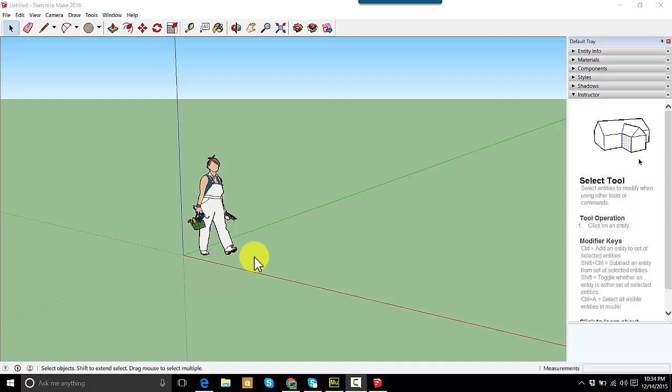Okay, so here we are in SketchUp. Let's make sure we have the toolbars we need, so we're going to go up to View and select Large Tool Set. So now we've got the large tool set up.

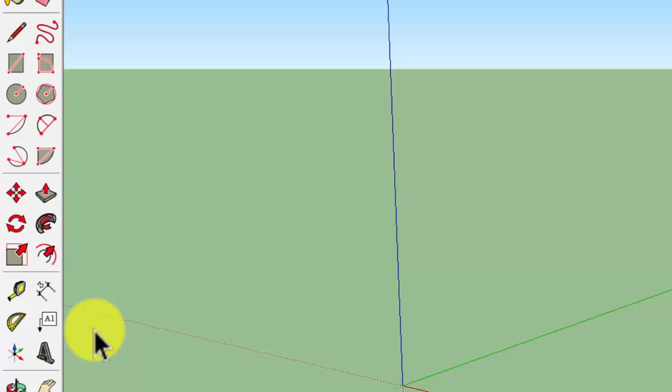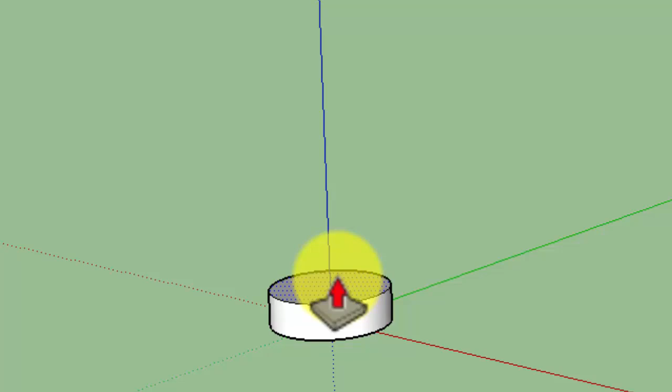The first thing we're going to do is get the circle tool and make a circle. You don't want to make it too big, but this is for the pot of your Christmas tree. Then you're going to get the push-pull tool and pull that pot up, however big you want it to be. You can look in the right-hand corner, and it'll tell you how many feet and inches it is, if you want to keep it scaled.

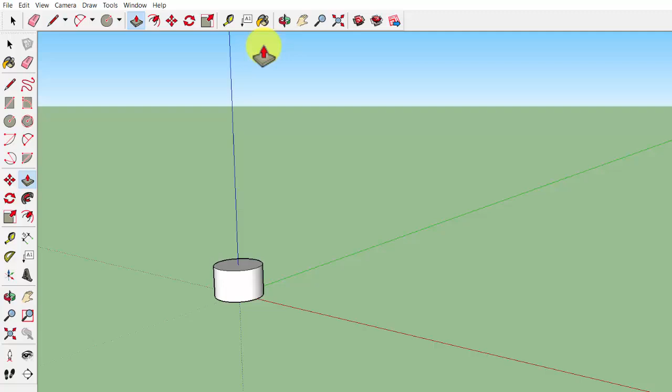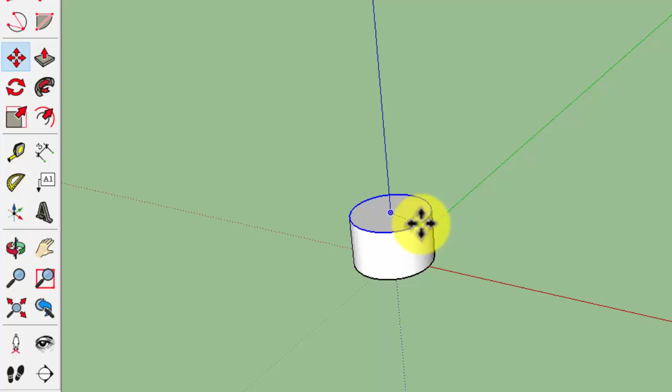I think I've got mine to about where I want it. I'm going to use the orbit tool just so I can see how it looks and make sure it's in the right place. Now I'm going to get the move tool, come out to the edge and try to find an endpoint. I just want the light blue to be on the edge, not on the face. This can be a little tricky, I'm going to try it a couple times. There, I got it.

So it kind of gives a flare to our pot. You don't want too much of a flare, but a little bit. Then I've got the orbit tool, and I'm going to just see how it looks. I think that looks pretty good.

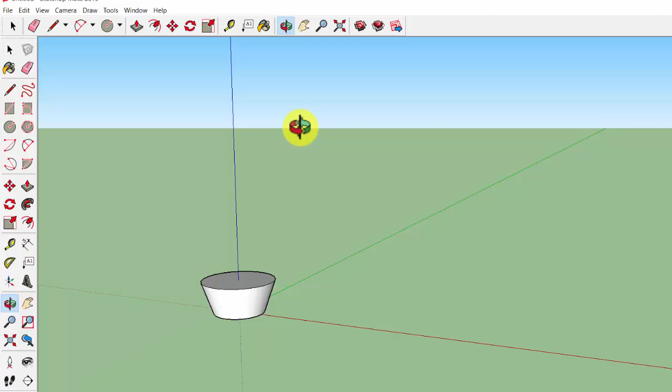Now we're going to make a brim for our pot. I'm going to go over and get the push-pull tool, but hold down control so I duplicate the surface. There you'll see there's a line, so it looks more like a pot. We made it flare out, and now there's a line.

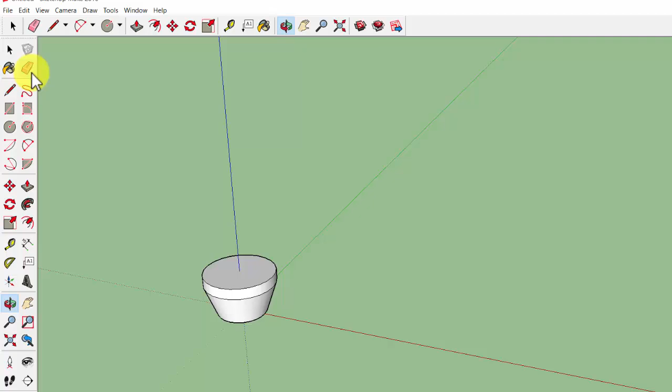I'm going to look around using my orbit tool again, go back and get the select arrow, and select the top. Then you're just going to click the delete key on your keyboard, and it'll make it look like it's shallow at the top. So it looks like a real pot.

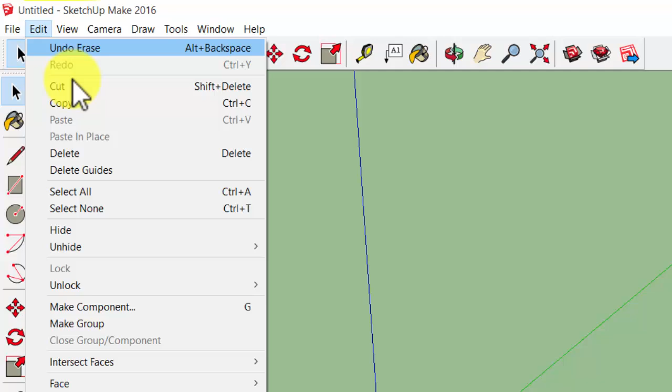I'm going to move it around. I need to group these things together, so I'm going to go up to Select All. Then I got them all selected, and I'm going to click Make Group. So now everything on the page is a group.

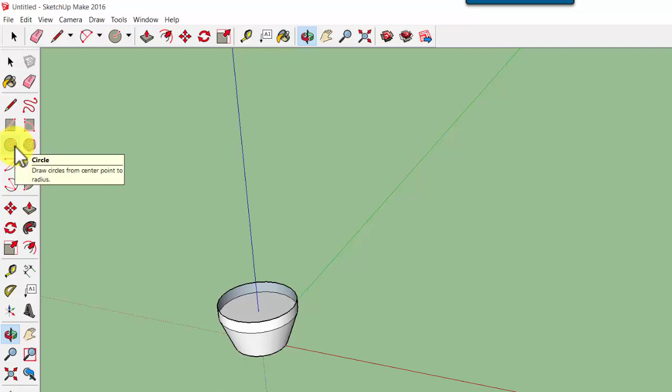Now I'm going to look about and make sure it's looking good. Now I'm going to make the trunk, so you're going to want to start right there in the center and make a small circle. Maybe I can see a little better, make sure I'm in the middle. You're going to pull out and make kind of a small circle. This is just the trunk.

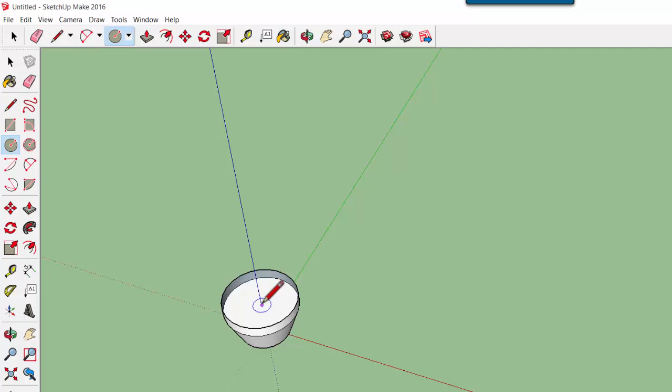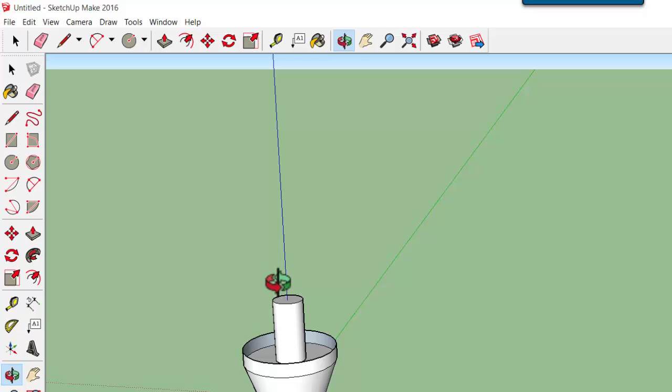Once I have the circle made, I bet you can guess, we're going to get the push-pull tool and pull it up a bit. If you want to see the dimensions, it's in the right-hand corner. But looking around at it, I think that's a little bit too tall, so I'm going to get the push-pull tool and push it back down. If you make a mistake, you just want to change it a little bit.

So let me get it again. Get the very top there. There we go, now push down so it's a smaller trunk.

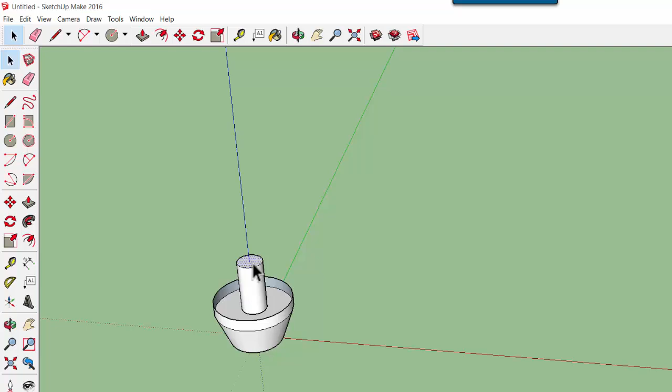Now I need to select group just the trunk. So I'm going to right click on the top circle and click select, and select all connected, because I don't want everything, I just want the trunk. So now the trunk is selected. I'm going to go up to edit and go all the way down to make group. So now my trunk is a group.

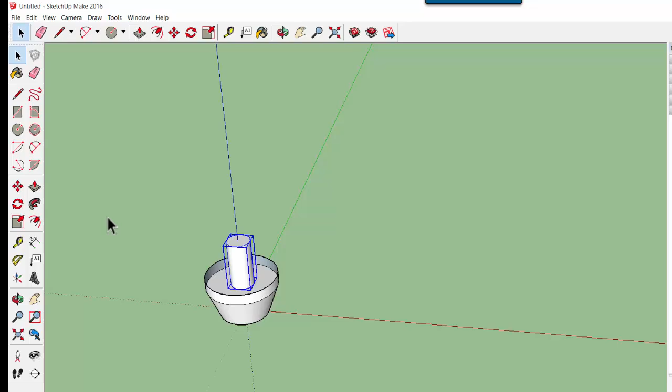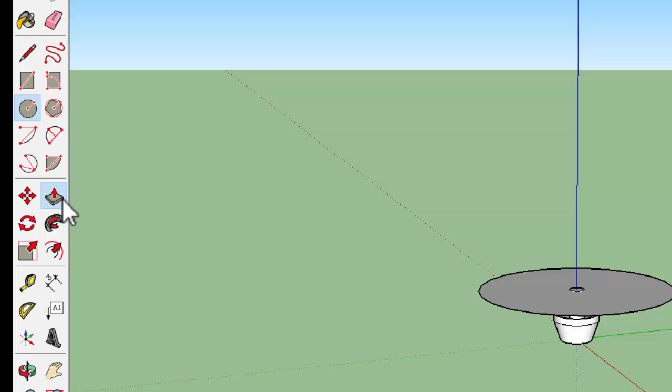And on top of this trunk, I'm going to put a circle. Make sure it's horizontal and drag the circle out. This is going to be the bottom of your Christmas tree, so it's kind of how pointed you want your Christmas tree to be. Then you got the push-pull tool.

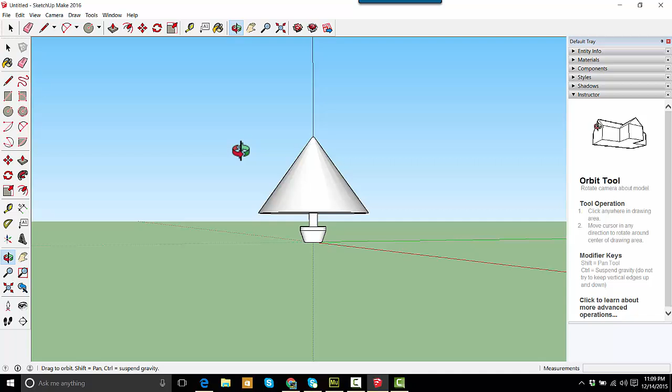Now this doesn't look too much like a Christmas tree, but it's going to, because we're going to get the move tool and try to select just the edge. Did you see that I caught the endpoint and pulled it in? That can be tricky.

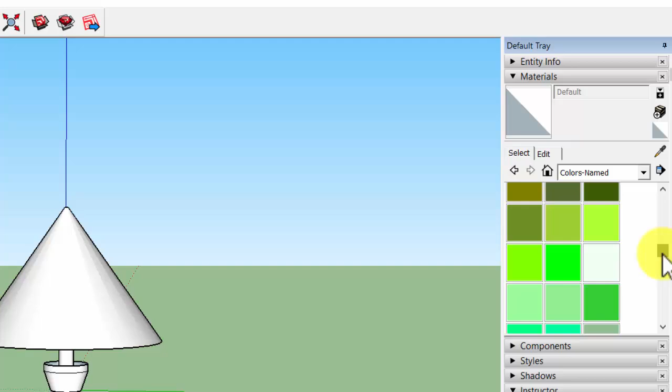And then we need to add, looks pretty good, but now we're going to add some color to it. So go up and get the paint bucket, and then come over and wherever your colors come up, click colors or colors named, or you can use patterns or whatever. I'm making a traditional tree, but you can make it any color you want, like brick or asphalt.

So now I'm going to change the color. I made mine green, and I'm going to make the trunk brown. Now you can go ahead and put all kinds of decorations on this one. You can make it spotted.